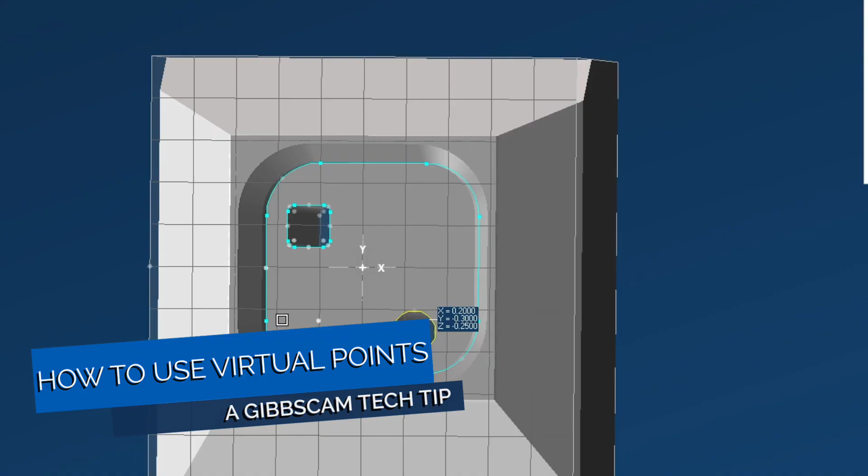In this video, I will be going over virtual points and how we can utilize them to make our workflow smoother. Virtual points allow us to avoid extra steps that were needed in the past to grab precise feature locations. Eliminating the need to generate unnecessary geometry saves time and effort. With that, let's jump in.

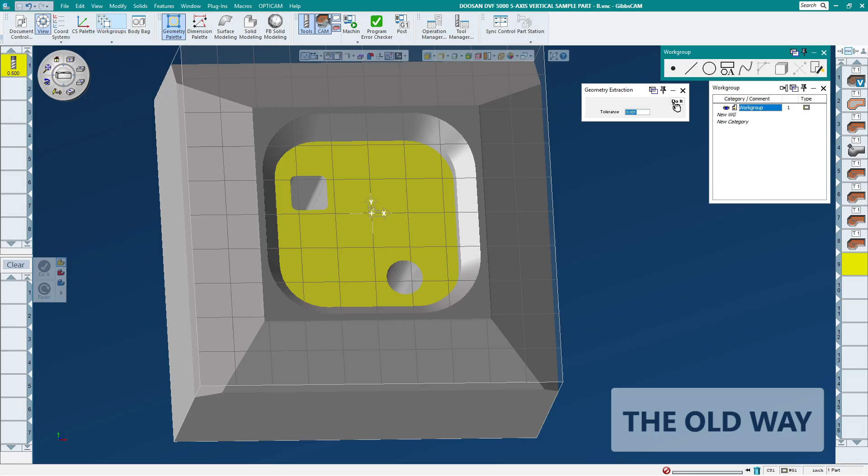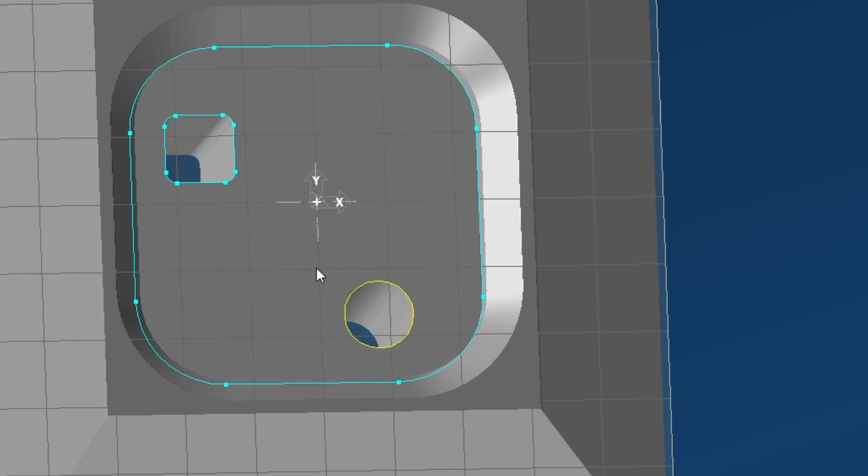In the past, if I wanted to find the center point of this hole, I would extract the geometry and then utilize the geometry palette to place a center point in the middle of this circle. With that point available, I could go up to the dimension palette and choose to measure the feature location. But maybe I don't want to leave this point here, and when I go to delete it, the dimension goes with it.

But with the addition of virtual points, all of those extra steps are eliminated, and we can leave dimensions in place without leaving excess geometry.

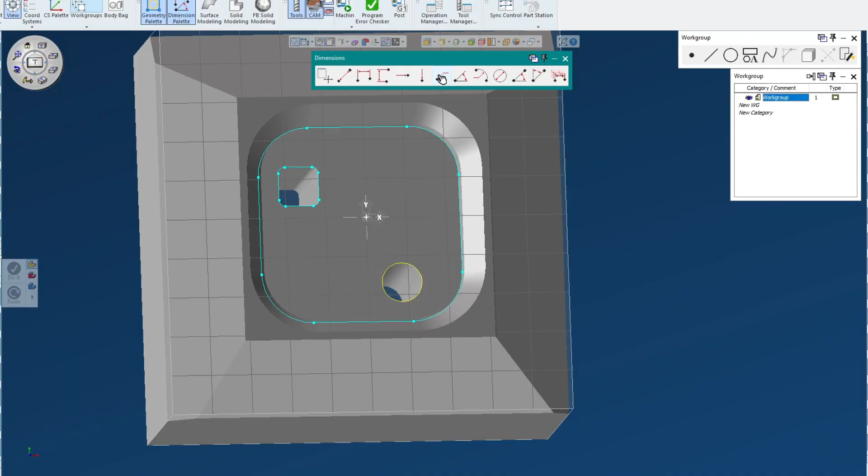When I go up to the View drop-down menu and down closer to the bottom to look for virtual points, I'll turn those on, and with the dimension palette open and any one of these tools selected, as I hover over these pieces of geometry, the virtual points appear. Those are the little gray points that appear and disappear based on how close your cursor is to them. You can see I can grab that center point and get the same dimension, but with no excess geometry, and the dimension stays in place.

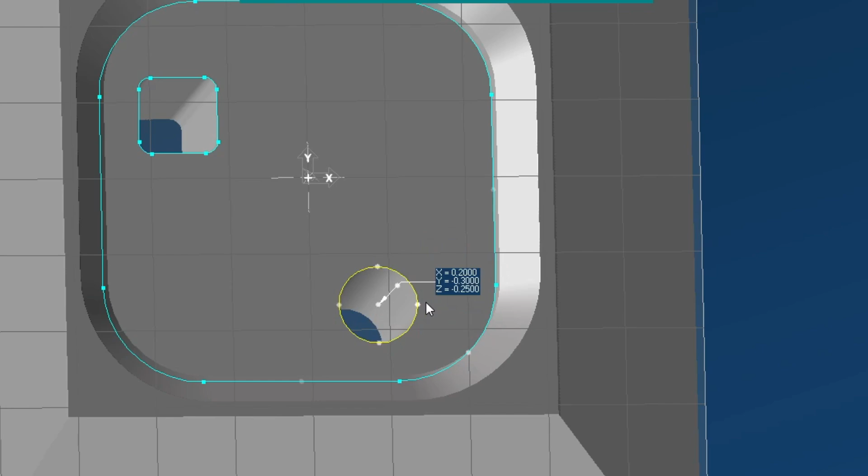But we get more options as well without having to manipulate that point. We get the center point of this circle, and we also get 4 quadrant locations on the circle. If we look at the square cutout, we get corner radii center lines and corner radii center points. We even get center lines on the flats. The stock cube also has virtual points that appear with it as well.

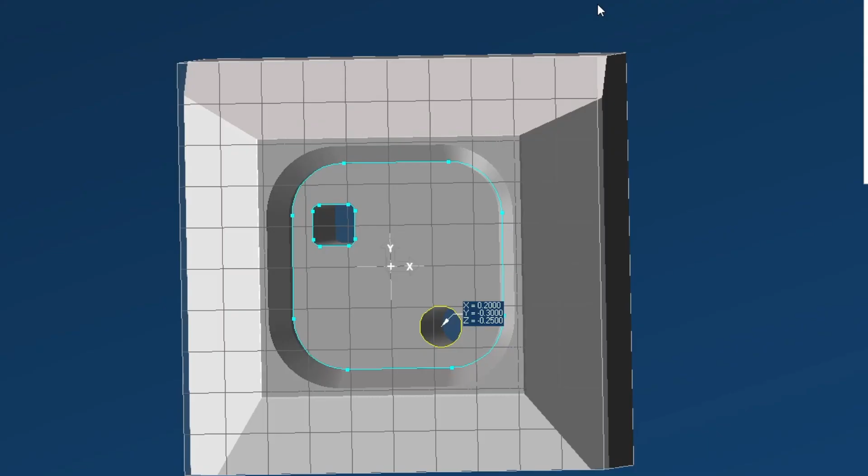Now there are many options for measuring, but that's not all they're good for. If you're familiar with utilizing the Alt key and clicking on a feature to grab values for any of the tools under Modify, or even process parameters such as depth values, you can see that when I hold down my Alt key, these virtual points once again appear.

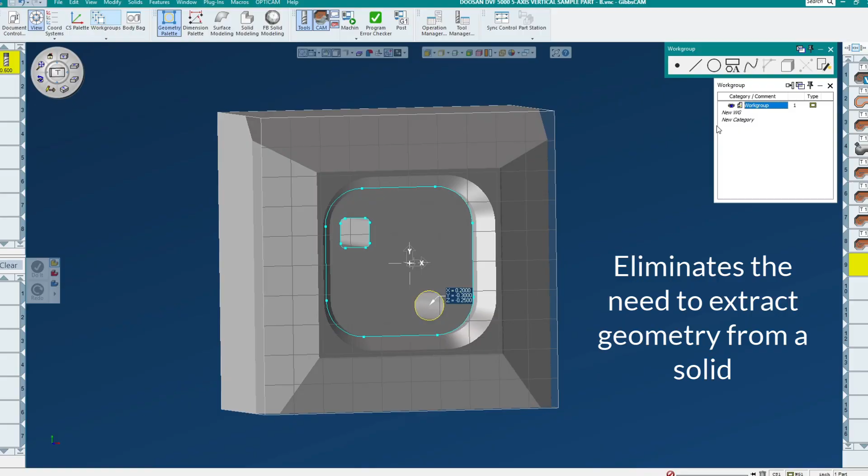Furthermore, virtual points really eliminate the need to extract geometry from a solid model in the first place. If I go to a new workgroup where we've got no geometry here, you can see I'll hold down my Alt key and nothing appears except for the cube coordinates, or the stock cube.

But as soon as I go up to the transparent toolbar and turn on edge selection, once I come back here and hold down the Alt key and hover over the edges, those virtual points all appear, again eliminating the need for any geometry extraction in the first place.

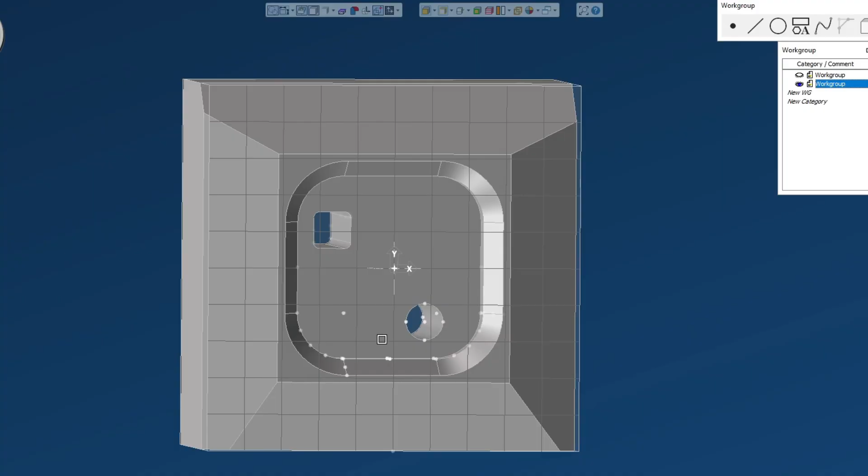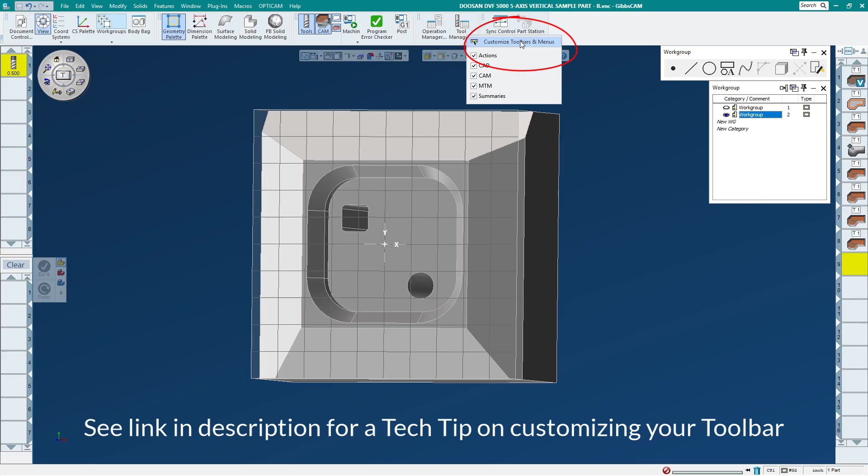Now, as you saw me do earlier, it's very easy to turn these on and off. We just go to the View menu and click the virtual points option, and now holding down the Alt key, we get no virtual points. Also keep in mind, you can add virtual points up here to your toolbar by choosing Customize Toolbars and Menus, just making that tool a little easier to access.

Utilizing virtual points can help you out by making programming just a little bit easier. Saving time and effort is always a great benefit, and these virtual points do just that. Also, having the control to turn them on or off whenever you please is a plus.